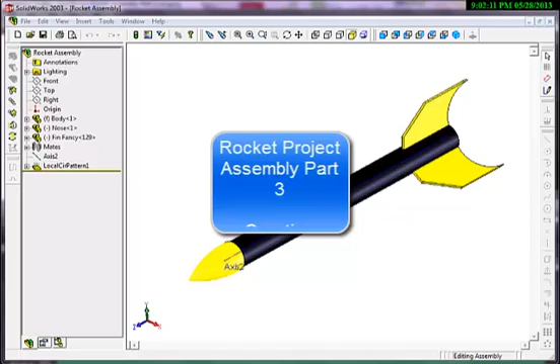This is Rocket Assembly Part 3, and in this one I'm going to show you how to do an exploded view. So what I'm going to do is make it so that the nose cone is pulled forward and the fins are pushed back so that you can see how the parts go together.

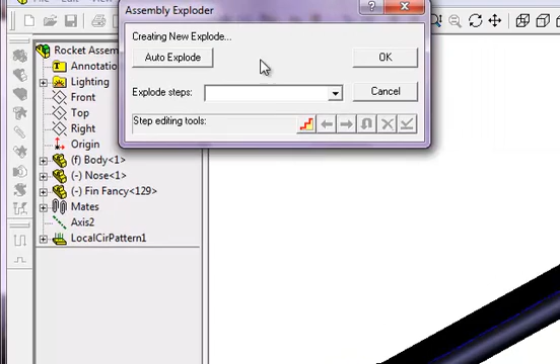So what I'm going to do is go to Insert, Exploded View, and I get this window. I have to click on the step to start the first step, and then it looks first for the direction to explode along. This is kind of a strange thing. You have to pick something that's perpendicular to the direction that you want to go, or in this case I can select along this cylinder.

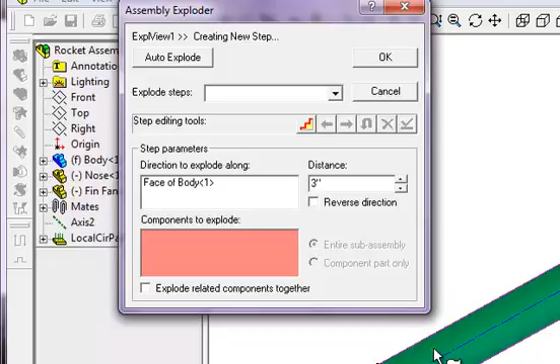So I'm going to click along there, and then I'm going to select the object that I want to explode, and you can see in here that it shows you the arrow, the direction that the translation is going to happen. So it's going to right now take the nose cone into the body.

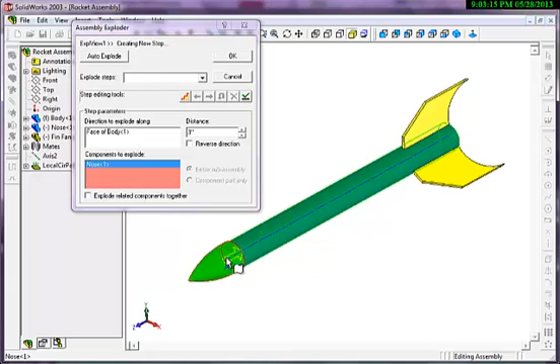I want it the other way around, so I can hit reverse direction, and then I can put in a distance here. I can put in whatever distance I want to. If I don't like 3 inches, maybe I want to try 5. I can say okay like that. I can also go back and put in 1 inch, see if I like that, and I think somewhere around 3 inches or maybe 4 inches looks pretty good.

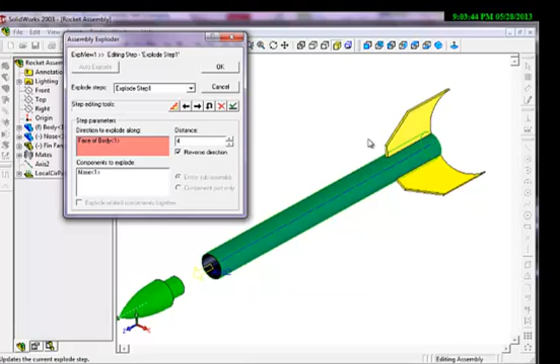So now what we want to do is move on to the next step in the exploded view. I click on the steps there, and again I need a direction. In this one, because we did the 3 tail fins as a component pattern, they're actually going to act as one unit, which is an unfortunate part of having done the component pattern. If I did put in each tail fin separately, then I could explode each one as a separate step, but it made doing the assembly much easier.

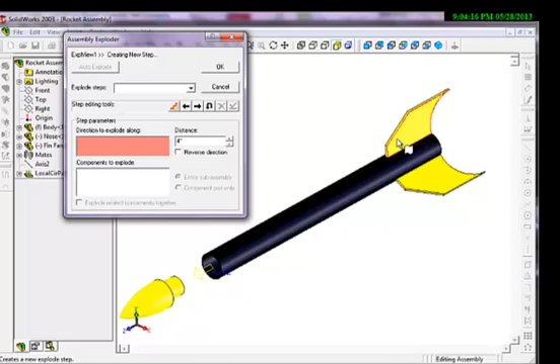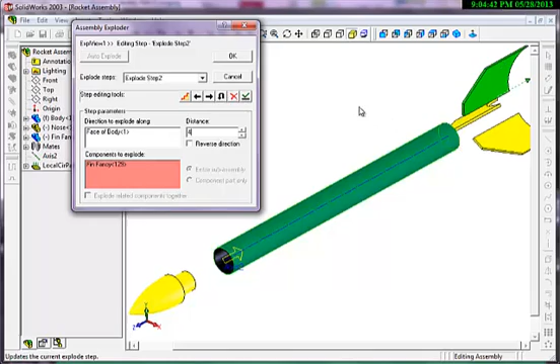So I'm going to click on this same cylinder again. I can see the direction that it's going to go on, and then I need to click on the tail fin. And then once again I'm going to put in the distance. I'm going to try 3 inches, see how it looks. Maybe it needs to be a little bit more, so we'll try 4 there, and that's not looking too bad. We could go even maybe 5 and just see if it looks good — that's pretty good like that.

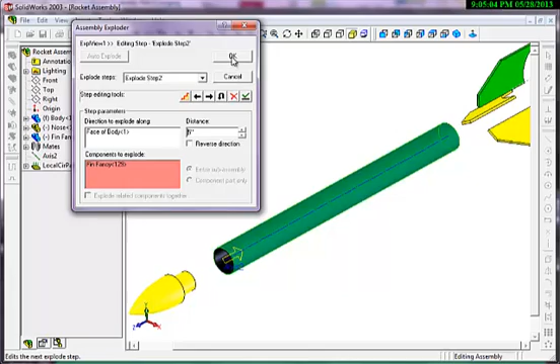So I'm just going to zoom out a little bit, and once we're done, we can at any time go back to any step and make any changes to that step that we want, and we can go and add any additional steps that we might want to do as well. So I'm going to say OK here.

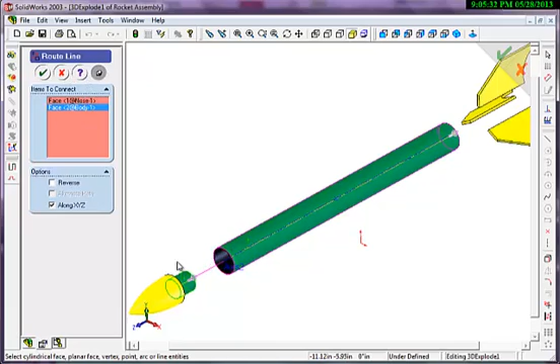Then what I'm going to do is I want to have lines showing how these would connect. So I'm going to go to Insert, Exploded Line Sketch, and now I'm going to select the components to connect. I'm going to select on here and select the cylinder, and now what it's going to do is make a line showing that connection. I'm going to do the same thing with this one and this one, and again it's going to show how the lines would be connected.

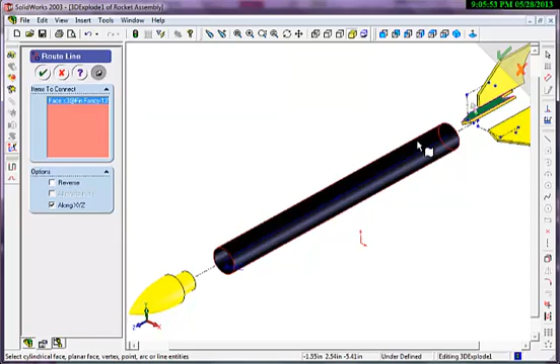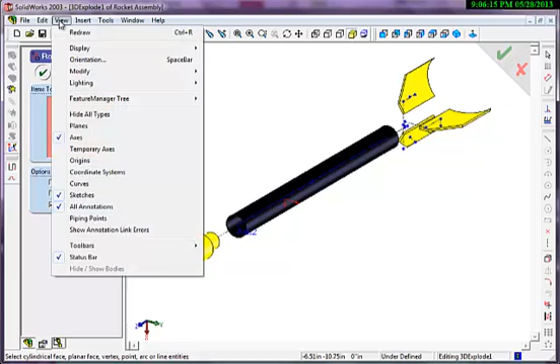Strangely enough, I have to do each of these ones separately, even though they moved all as one object. I'm sure if we looked into it far enough, we could find how to explode them separately, but for now that's fine. And we can zoom out. At this stage we don't really want to see the axis, I've turned mine off there, and now we've got a good exploded line sketch.

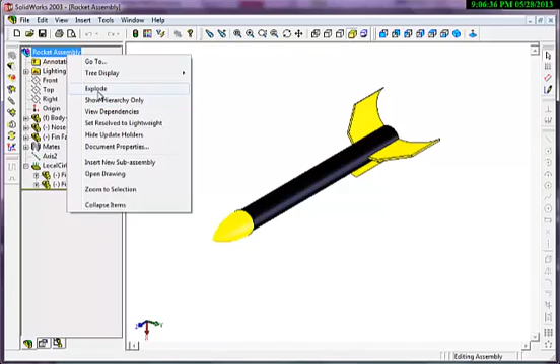So I'm going to select that last one, and then at any time what we can do is go up into the tree, go up to the very top of the assembly, and go to collapse, and I'll see the assembly in a collapsed view. Go back up, right click, and go to explode. And that's all that we're going to show you for part 3.